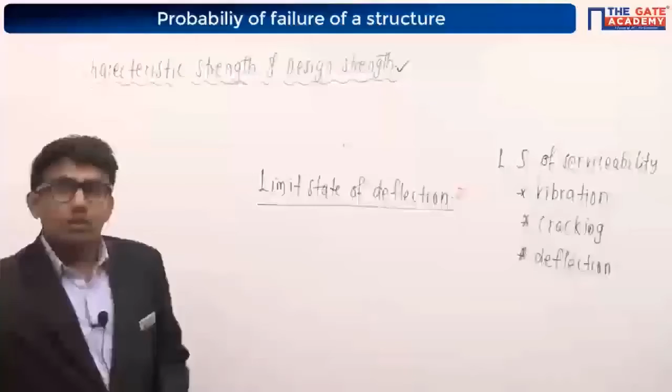So if you can solve this question, at least you can try this question. I think you may not be able to solve this question, but if you are able to solve it, superb, very good, try this question once. The question is, according to the concept of limit state design as per IS 456-2000, the probability of not failing the structure is. Even if you give the wrong answer, I will be very happy, at least you are trying. Yes sir, this question is already asked in GATE, it is a GATE question actually, but I have modified this question a bit.

I know some of you will have this equation by heart. Till now we have discussed about characteristic strength and characteristic load. When we talk about the failure of the structure, as per IS 456-2000, that code will consider a structure failed when... yes, this question. So I am coming to that, I will explain this and give you an explanation for this question. You can keep that question aside and listen here. So what is the possibility of failure of a structure?

As per IS 456, we have discussed characteristic strength, that is strength of the structure, and characteristic load. So there are actually two possibilities for a structure to fail. Possibility number one, I am going to consider it as P1, that is based on strength criteria, that is strength of the material. What was characteristic strength? The strength below which not more than 5% of test results are expected to fall. Which means if the strength is below that 5%, then the structure will fail.

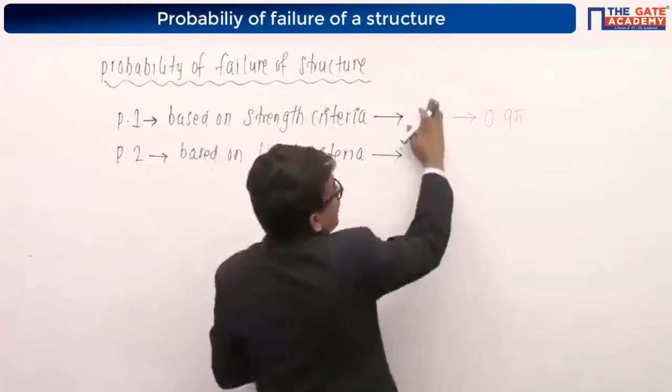What is the probability of failure there? It is around 5%, right? What is the probability of not failure there? It is also 0.95, because it has a 95% probability of not being exceeded.

Probability of not failing is 0.95 based on load criteria, and based on strength criteria also it is 0.95. So what is the overall probability of not failing? Here you have to refresh the concepts you studied in probability. These two events are independent. For independent events, the overall probability will be equal to P of A into P of B, if A and B are independent events. P of A here is 0.95, P of B here is 0.95, and the overall probability of not failing will be equal to 0.95 into 0.95.

Then tell me, what is the overall probability of not failing? It will come around 0.9025, or 90.25%. Which means that if you design a structure as per limit state method of design, the overall probability of not failing that structure is around 90.25%.

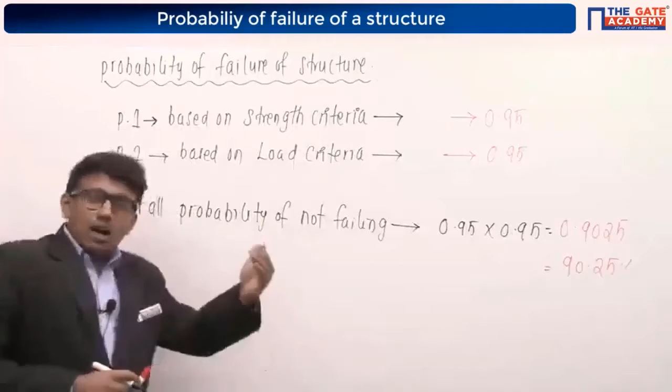Some of you are giving me the answer for overall probability of failure. If we modify this question again, what is the overall probability of failure of a structure as per limit state method of design, as per IS 456-2000? Can you give me the answer?

Give me the answer. Yes, 9.7. Superb. Why are you getting that?

Overall probability of not failing the structure is 90.25 or 0.9025. So overall probability of failure is around 1 minus 0.9025, which comes around 0.0975, or 9.75%. Overall probability of failure of a structure, when designed as per limit state method, will come around 9.75%. Overall probability of not failing a structure, per limit state method, will come around 90.25%. What is the meaning of these two sentences?

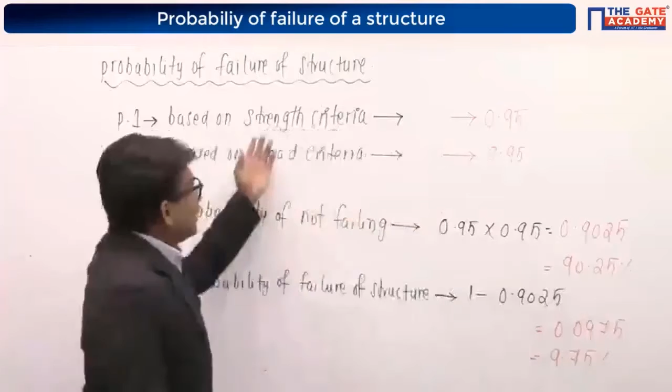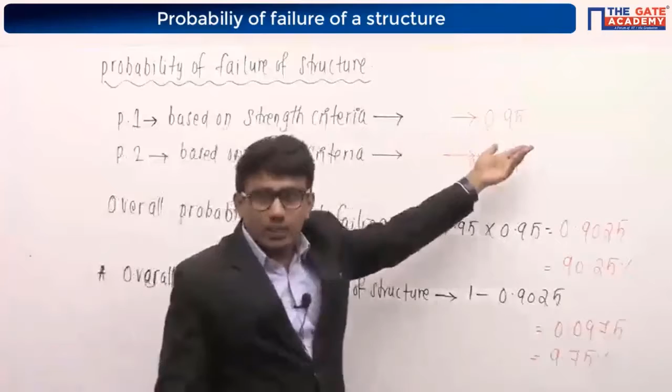In the limit state method, we have to consider two cases: material and load. When the load is more than the characteristic load, we consider the structure failed. If the strength is below the characteristic strength, we consider the structure failed. So there are two possibilities: either strength is more than the characteristic strength or less than it. There is a 5% chance of failure and a 95% chance of non-failure. Similarly, when the load is more than this value, there is a 5% chance of failure and 95% chance of non-failure.

So probability of non-failure as per strength criteria is 0.95, and as per load criteria is 0.95. Since they are independent events, the overall probability will be P of A into P of B, that is 0.95 into 0.95. We get overall probability of non-failure as 0.9025, which comes around 90.25%. Overall probability of failure of the structure will be 1 minus 0.9025, giving us 9.75%. Is it clear?

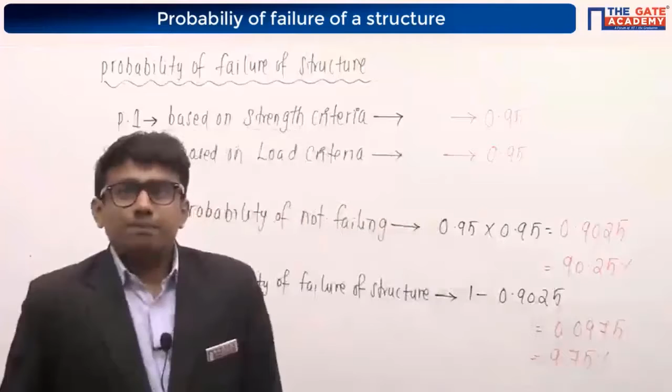So please give the next heading, grades of concrete. Grades of concrete - sorry, let me write it again. Give the heading: Grades of Concrete.

Tell me, what is this grade of concrete? Grade of concrete is actually based on the characteristic compressive strength of the concrete at the end of 28 days of strength. It is a strength value based on characteristic compressive strength, that is FCK, the characteristic compressive strength of concrete at 28 days. We calculate the characteristic compressive strength at 28 days, so it is based on that value.

So based on this characteristic compressive strength, we have different grades of concrete. We have M10 grade of concrete - we will discuss what this M10 means - and we have M15, M20, M25, like that, up to M55, M60, M65, going on till M90. We also have M5 and M7.5. It goes like M10, M15, M20, M25, M30, M35, M40, M45, M50, M55, M60, M65, M70, all the way till M90.

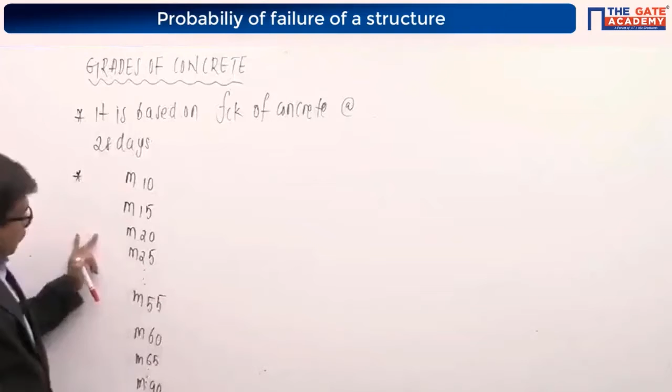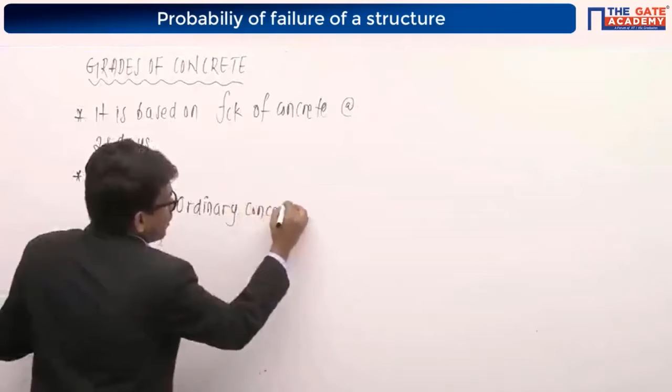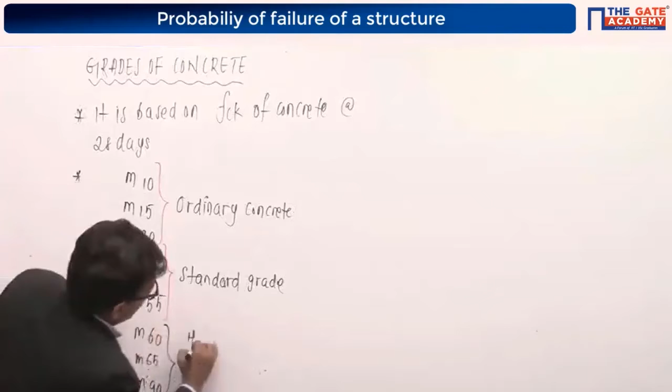So these are the different grades of concrete available. If you look at these various grades, from M10 to M20 is called ordinary grade or ordinary concrete. From M25 to M55, it is standard grade. From M10 to M20, it is called ordinary grade of concrete, and from M25 to M55, it is called standard grade. M60 and above is called high strength concrete. Above M60, it is high strength concrete.

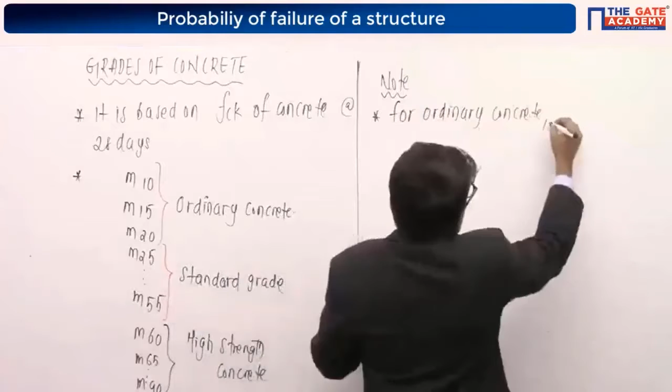So when we discuss the grades of concrete, you have to remember something here. Our IS code suggests that we have to use a minimum grade for ordinary concrete or ordinary construction in RCC. For ordinary construction or ordinary RCC, we have to use a minimum grade of M20. That is, for normal construction with reinforcement concrete, the minimum grade to be used is M20.

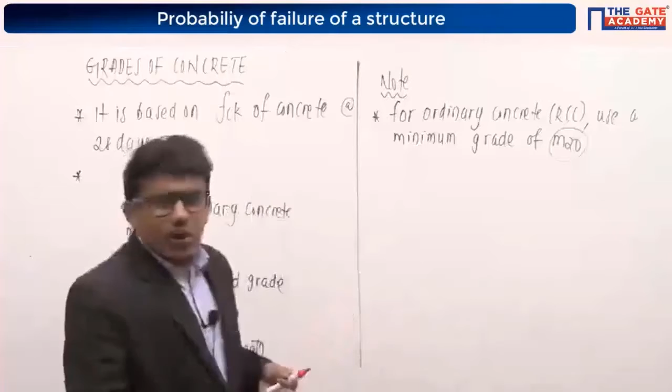We have to use a minimum grade of M20. Now you can ask me, but this grade of concrete actually depends upon exposure conditions. I'll tell you what these exposure conditions are. It is not always true that minimum grade must be M20. Our IS code says that for ordinary concrete, minimum grade of concrete must be M20, but it is not always true - it depends upon the exposure conditions of the concrete. I'll come to that.

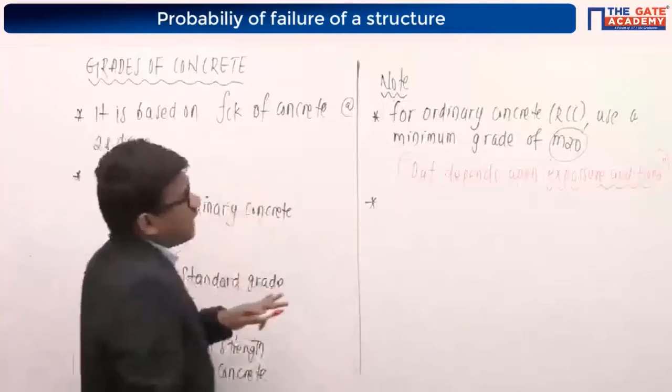Some of you can ask me, sir, what is this M20? If I take M20 grade concrete, what is this M? What is this 20? Yeah, exactly. M stands for mix, and 20 stands for FCK in Newton per mm square at 28 days, or the characteristic compressive strength of the concrete at the end of 28 days.

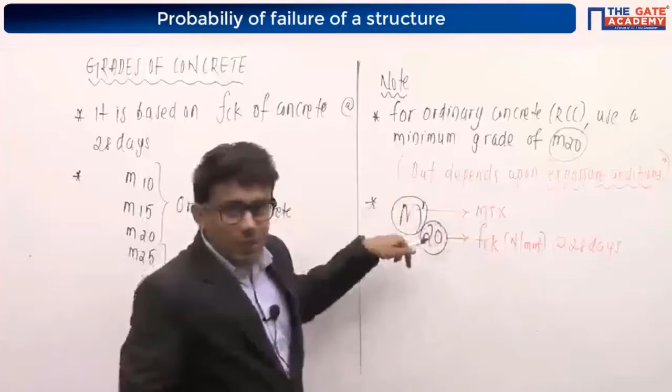Mix means we are mixing cement, fine aggregate, and coarse aggregate in different ratios. That is actually our representation of the mix. M represents mix of the concrete, and 20 is the characteristic compressive strength of the concrete at the end of 28 days.

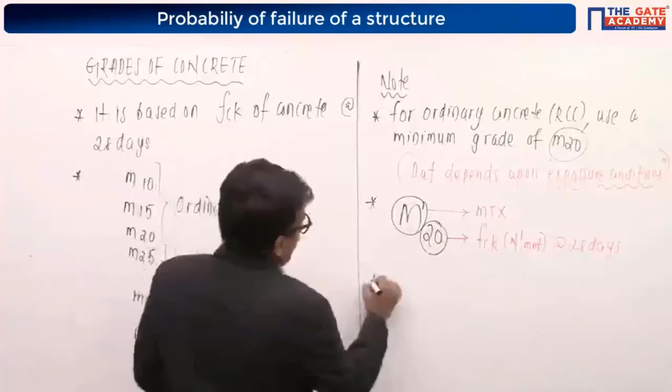Coming to one more point, our IS code says that the maximum grade that can be used is M60. Grades of concrete above M60 are not allowed or not taken into consideration. The maximum grade of concrete we are using is M60, not M65, M70, M75. All these are not considered in IS 456-2000. The maximum grade considered in our design as per IS 456-2000 is M60.

Srikanth is asking what is this mix. I'll write it here. For M20 concrete, the mix value will be 1 is to 1.5 is to 3. That means we'll take our ingredients of concrete - cement, fine aggregate and coarse aggregate - in this ratio: 1, 1.5 and 3. This is actually the meaning of mix of the concrete.

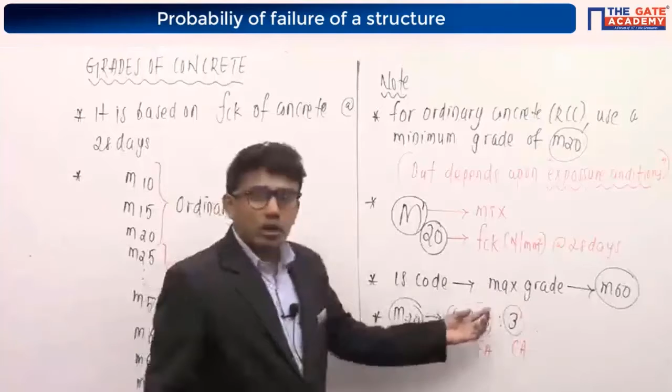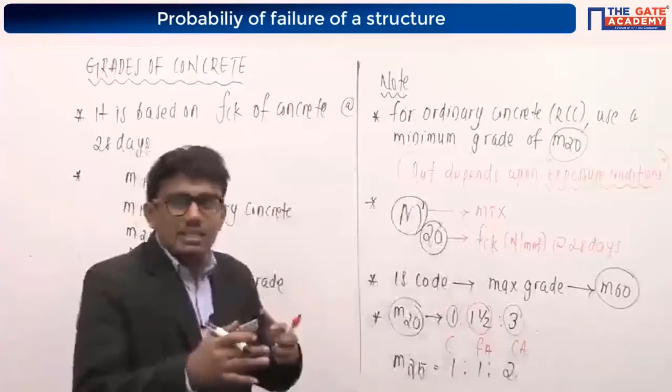For M20 concrete, it is 1, 1.5, 3. For M25 concrete, it is 1, 1, 2. It will keep going like that. Different mixes are available for different grades of concrete - the mix will be different. That's the meaning of mix - we are mixing all these ingredients. The ratio of these various components will be different for different grades of concrete.

For M5 concrete, the mix will be 1, 5, 10. For M7.5, it will be 1, 4, 8. For M10 concrete, it will be 1, 3, 6. For M15 concrete, it will be 1, 2, 4. For M20 concrete, it will be 1, 1.5, 3. And for M25 concrete, it will be 1, 1, 2. This means cement, fine aggregate, and coarse aggregate of the concrete.

Up to M25 we will be having nominal mix - these things are available. Above M25, you have to design the mix. Sir, how do you remember all this? See, you have to think in a different way.

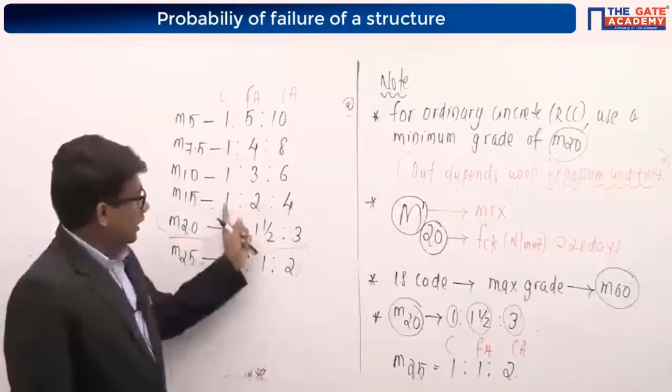I used to remember it in this way. If you want, you can remember it like this. We'll start with M5, right? So 1, 5, 10 - M5 is there, that is 1, 5, 10. Then the rest you can write: 1, 4, 8, then 1, 3, 6, then 1, 2, 4. Here a slight change happens - 1, 1.5, 3 for M20 concrete. Only for M20 concrete there is a slight change, and the same pattern repeats after this: 1, 2, 4 becomes again 1, 1, 2. You can remember it with your own shortcuts - it will be better.

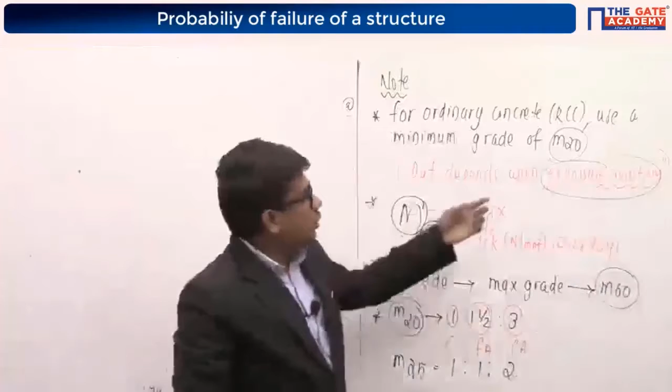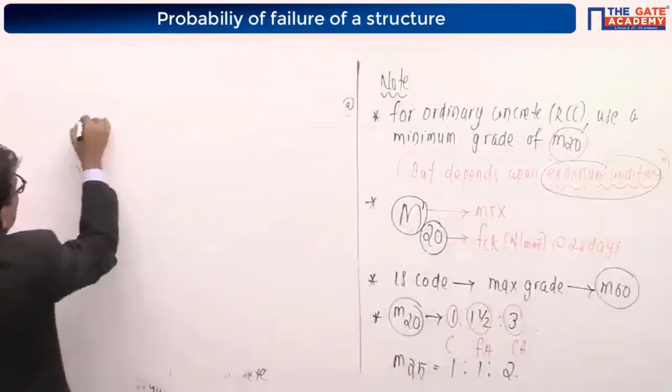So just now we have discussed about the exposure conditions. What are these exposure conditions? I told you for ordinary construction, as per IS 456-2000, we have to choose a minimum grade of M20, but it depends upon the exposure conditions. The IS code gives these things in a table, where the first column is exposure conditions, and the second column is the minimum grade of concrete to be used.

Minimum grade of concrete to be used. What is exposure condition, and what is the minimum grade of concrete to be used?

Exposure conditions are classified into five types. First is mild exposure conditions, second is moderate, third is severe, fourth is very severe, and finally we have extreme exposure conditions.

IS code suggests that for mild exposure conditions, you have to use minimum M20 grade concrete, and we cannot use M15 concrete there. If the exposure condition is moderate, you have to use a minimum M25 grade concrete.

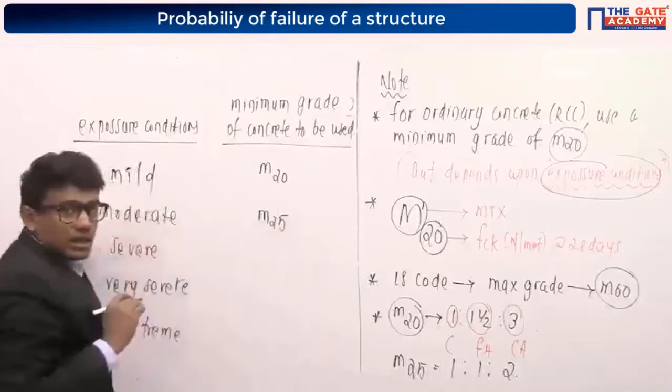If it is a severe exposure condition, we have to use a minimum grade of M30. For very severe condition, we have to use M35 grade concrete; we cannot use M30 there. For the extreme case, we have to use a minimum grade of M40.

You can ask me, sir, what are these exposure conditions? What is this mild exposure condition? What is this moderate exposure condition? What is this severe exposure condition and so on?

For mild exposure condition, if the concrete to be constructed is not exposed to weather conditions - suppose you see a ceiling above you, this ceiling is not exposed to rain or weather conditions - for these ceilings a minimum of M20 is required. Only minimum M20 is needed; we don't need to provide M30 for such cases. The minimum that can be provided is M20, or below this is not recommended.

So when the concrete is not exposed to weather conditions, or when it is exposed to small or light rain, we can use these mild exposure conditions.

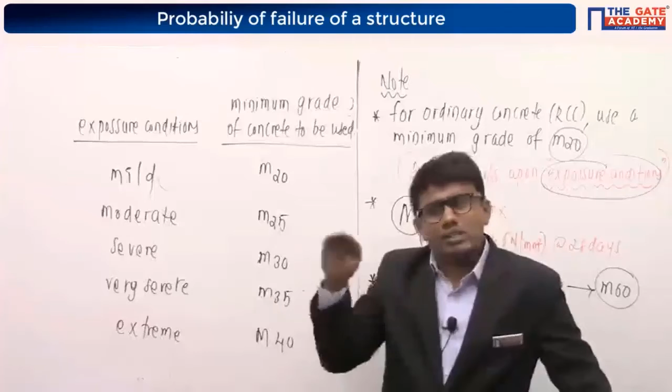Similarly, for moderate exposure condition - when the concrete is exposed to rain, like the ceiling over the top floor, or when the concrete is under pure water, or when it is not under the action of any aggressive environment, we consider that as moderate exposure condition.

Mild condition means the concrete is not exposed to any weather conditions, or it can be exposed to light rain, meaning very small intensity of rain. Moderate condition means the concrete is exposed to rain, or it is under water, but it is still not exposed to any aggressive environments.

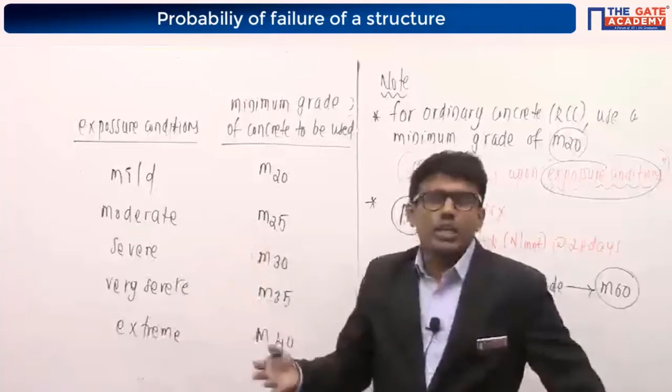Coming to severe conditions, the concrete is exposed to heavy rain, and if the structure is beside any seashore - now you know what a seashore is - if the structure is in a coastal area, or subject to some aggressive environment, we consider it as severe exposure condition.

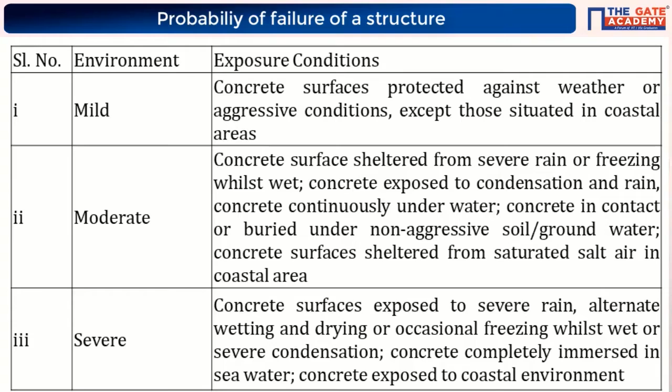It will go like that for the remaining conditions. All the things are given here in this table, which I have taken from IS 456-2000. It tells us which exposure condition to consider as mild, which to consider as moderate, which as severe, which as very severe, and which as extreme condition.

For very severe condition, we consider it when the concrete surface is exposed to corrosive fumes, or when the concrete is buried in aggressive soil, etc. For extreme condition, when the concrete is in a tidal zone, or it is an offshore structure, it will be considered as extreme weather condition.

For these conditions, we have to use a minimum of these grades. You can go through this table once - you have the environmental conditions there: mild, moderate, severe, very severe, and extreme, along with the corresponding exposure conditions. Go through them now, and after that we will continue with the other concepts.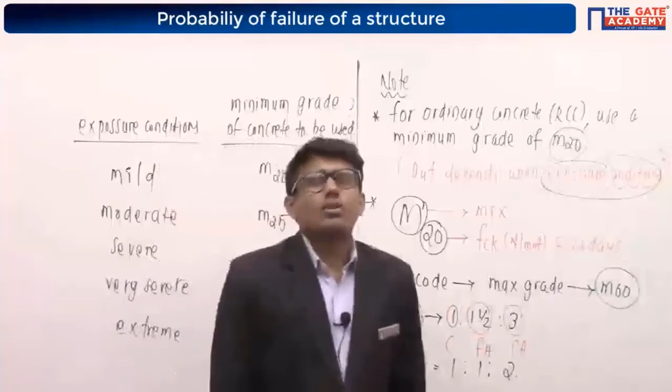Go through those two tables - mild, moderate, severe, very severe, and extreme. You have to remember this, because IES has asked questions from this concept around 3 times.

For offshore structures, the minimum grade of concrete to be used is M40. Offshore structure means the structure is subject to tidal effects, it is in the tidal zone. So you have to use a minimum of M40 grade concrete.

One time they asked: for structures in coastal areas, what is the minimum grade of concrete to be used? Can you tell me what is the minimum grade of concrete when the structure is in a coastal area? Yes, M30. It was a great question actually.

So they are asking questions from this condition. So you have to remember this.

If it is not exposed to rain or any weather conditions, it is mild. If it is exposed to light rain, or not in any aggressive environment, we consider it moderate. For severe, when it is subject to heavy rain, or if the structure is in a coastal area, we consider it as severe.

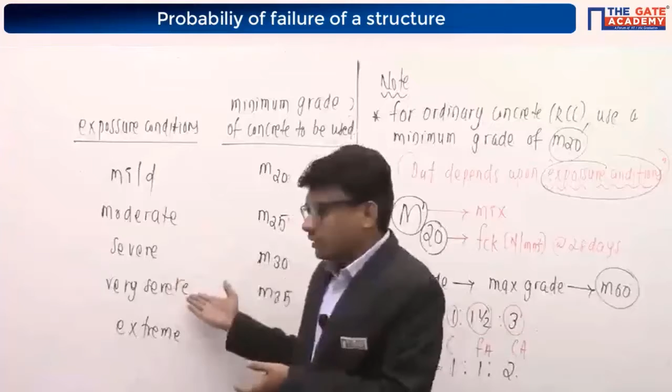Similarly, you can follow the other conditions. Don't try to by-heart them, just try to understand them, about nuclear radiation.

For nuclear radiations and such, you have to consider high strength concrete, not even M40. You have to go with high strength concrete - you can make the concrete as strong as possible. These are just criteria. If you want, you can consider it as an extreme condition - it will definitely come under extreme conditions.

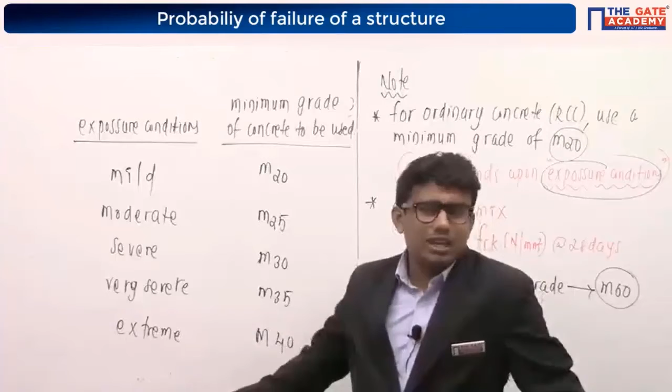You have to use a minimum M30, M40. But anyhow, if there is nuclear radiation, you have to use a higher grade concrete, or the maximum grade possible. Suppose if you want, you can use M60 or even M65. It's a matter of safety.

Rudraj is asking, isn't water good for concreting? Yes Rudraj, actually after setting, water is required at the early stage of concrete. The purpose is for curing. It is called curing, so we need water for the proper attainment of strength.

But in the later stage, it will affect the strength of the concrete. Please note it down. You can write the summary of this table in your book. Don't try to mug up this table, but go through it once - it's important, that's why I'm giving you this table. Just go through it and write the summary.

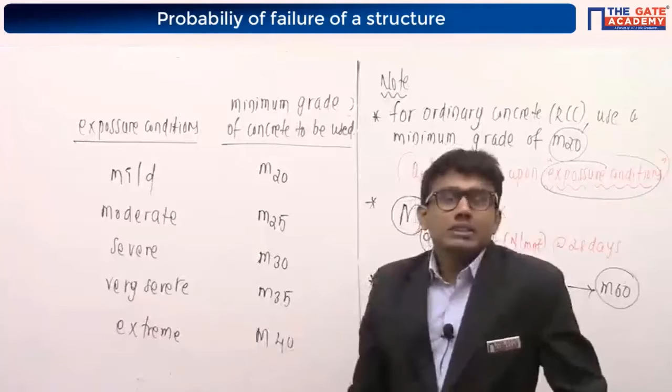Rudraj asks if it will not help in getting full strength. See, if it is exposed to water for a very long time, it will affect the strength. No - water in the initial stage helps the concrete gain strength. In the later stage, see, too much of anything is not good - the same thing is applicable for concrete also.

Go to this question, you already know the answer. A reinforced concrete structure has to be constructed along a sea coast. The minimum grade of concrete to be used as per IS 456-2000 is: option A M15, option B M20, option C M25, option D M30.

We can easily eliminate option A, because for an RCC structure, as per IS 456-2000, we have to use a minimum grade of M20. So we cannot use M15, and we can eliminate option A. Coming to option B, C, D, we have to think about the exposure conditions of the concrete.

We have to think about whether it is in mild, moderate, severe, very severe, or extreme conditions. Here it is given that the structure is constructed along a sea coast, that is, in the coastal area. If it is in the coastal area, the exposure condition is severe, and the minimum grade of concrete to be used is M30. So the answer here is option D.

Right now, if this is the sea, this is the land, and you will be constructing the concrete here. This concrete structure is actually subjected to the wind from here - wind will be continuously blowing from the sea.

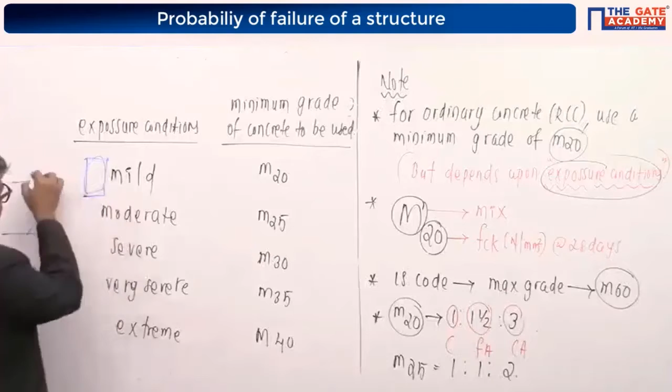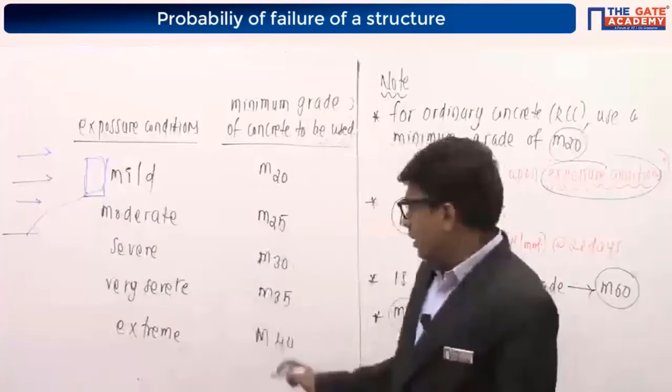It will be having salt content, so it will affect the strength of the concrete. It will cause corrosion and all. That's the reason why we are increasing the strength of the concrete by increasing the grade. If it is in salt water, then we have to use M40, a higher grade of concrete.

So the next one is the acceptance criteria. We have to discuss one more concept here. What is this acceptance criteria?

Suppose I am taking a grade of concrete, I am considering M20 grade concrete, and I know the mix to be used. What is the mix to be used here? It is 1:1.5:3. So this is the mix to be used for constructing our M20 concrete.

So we are going to construct and test the strength of this, testing the compressive strength of the concrete. For that purpose, usually we go with our cube strength test, which we have discussed just now. We will consider a cube of size 150mm by 150mm, and take different numbers of cubes.

Suppose cube number 1, cube number 2, cube number 3 are there. Suppose we have n number of cubes. I'll take cube number 4, cube number 5, and we have taken n number of cubes for finding the compressive strength of the concrete.

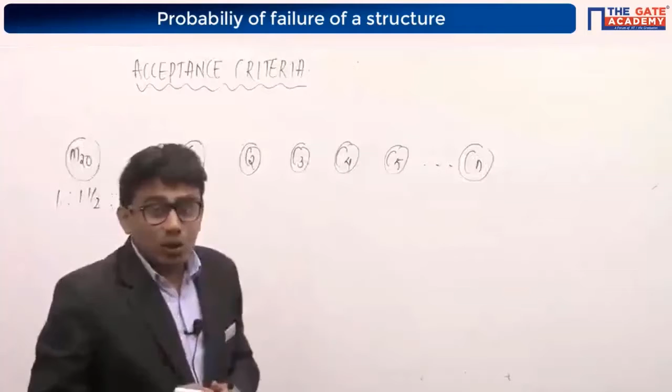So each cube will give some compressive strength. Our IS code suggests that we take a minimum of 3 samples and calculate the mean strength of each cube.

Suppose I have taken C2, C3, and C4. The compressive strength of cube C2 I will consider as F1, compressive strength of C3 as F2, and compressive strength of cube C4 as F3. So these are the compressive strengths obtained from cubes C2, C3 and C4.

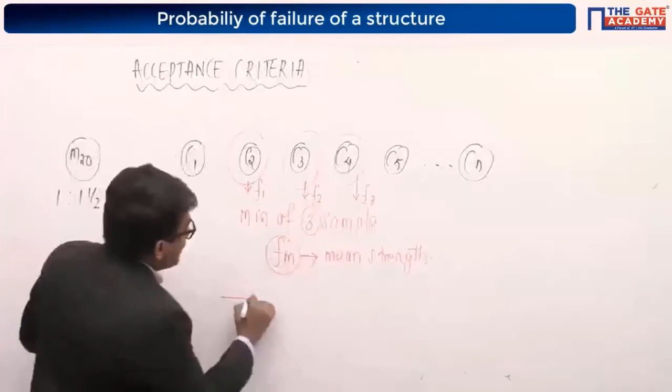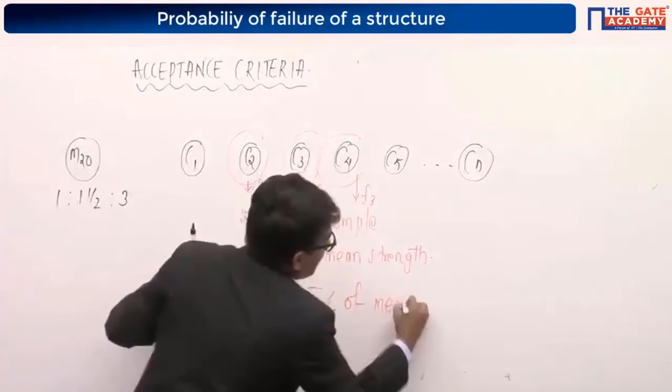Our IS code says suppose Fm is the mean strength, we have taken a minimum of 3 samples, and Fm is the mean strength. The percentage variation of the strength, that is F1, F2 and F3, must not be greater than plus or minus 15% of our mean strength.

You have to remember this. If it is more than plus or minus 15% of the mean strength, we will not use this grade of concrete for design or construction. We cannot use that concrete for construction.

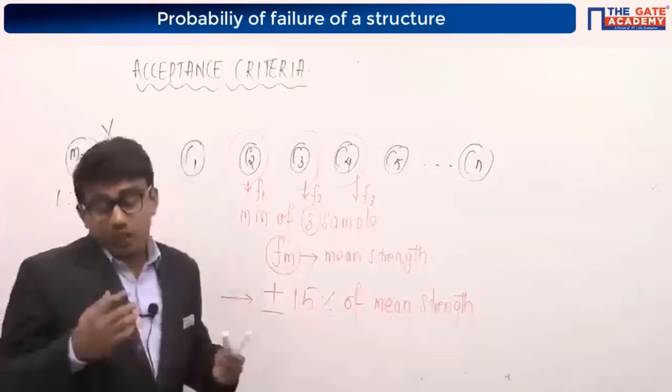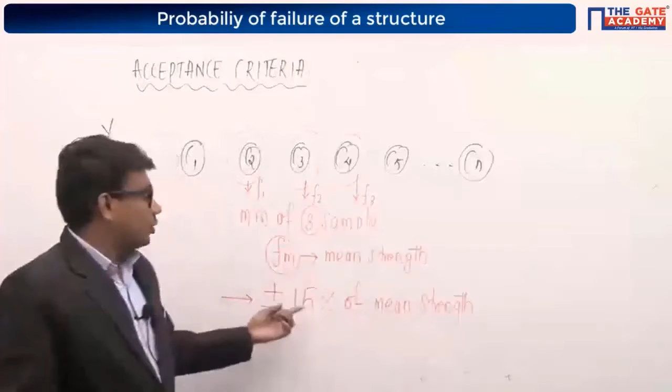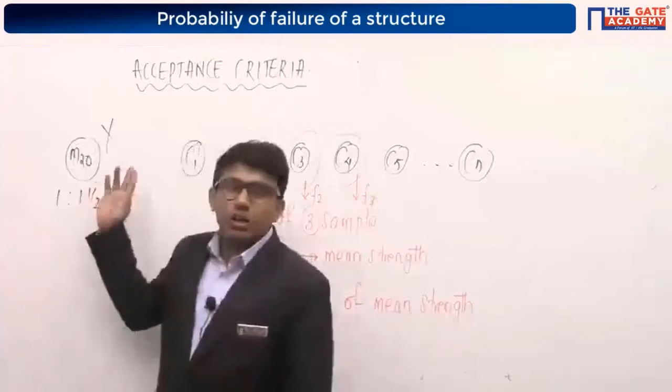So if I want to use M20 concrete, we will mix n number of cubes, take randomly a minimum of 3 samples, and find the mean strength of those 3 samples. The individual variation must not be greater than plus or minus 15% of the mean strength. If it is more than 15%, we cannot use that concrete for construction. This is the acceptance criteria.

What IS code says is that we'll take a different number of samples and go with the cube strength test for finding the strength of the concrete to be used. So I have taken one grade of concrete, that is M20 grade.

Yes, Rudraj, you are right. Then not the strength, that percentage variation.

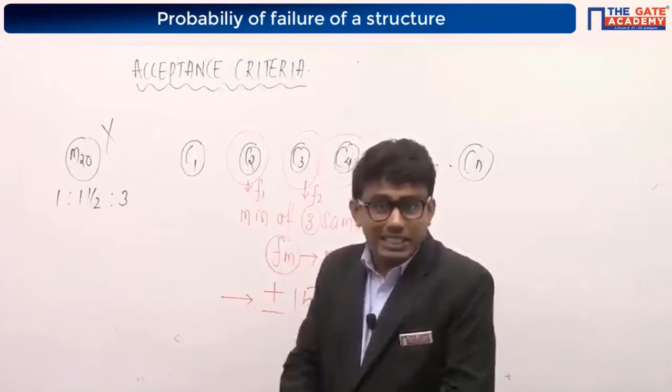I'll tell you that. Suppose we have taken n number of cubes. I have taken the mold, put the concrete, after 24 hours taken it outside for curing, and after 28 days tested the compressive strength of each concrete. Suppose these are the n number of cubes we have taken.

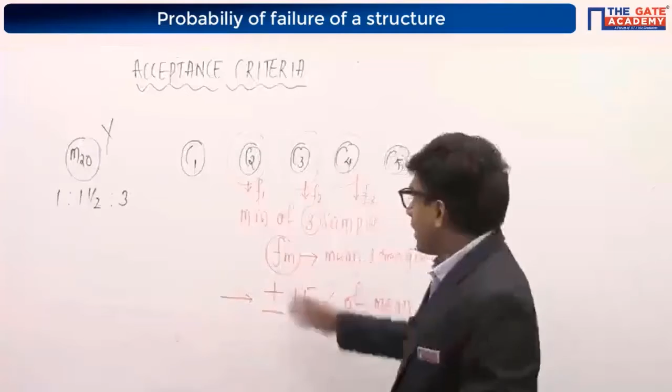Instead of calculating the strength of each and every cube, our IS code says we can randomly collect 3 samples from the number of cubes prepared, a minimum of 3 samples must be selected. Calculate the mean of these samples, and after that calculate the percentage variation.

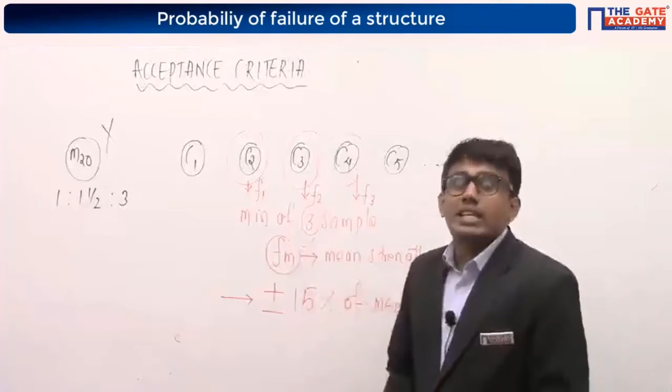What is this percentage variation? Suppose this is F1, the strength of cube 2, and Fm is the mean strength. What is this percentage variation?

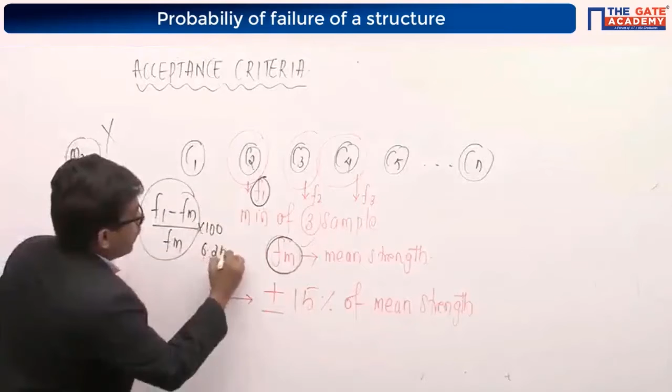F1 minus Fm divided by Fm, into 100, will give you the percentage variation. Suppose I got it as 6.25% for cube number 2. Since 6.25% is within the limit, I will accept this concrete, C2.

Similarly for C3, suppose I calculate it using F2 minus Fm divided by F2. Sorry, it was Fm in the beginning, now it is F2. Not Fm here, it is F1 and F2.

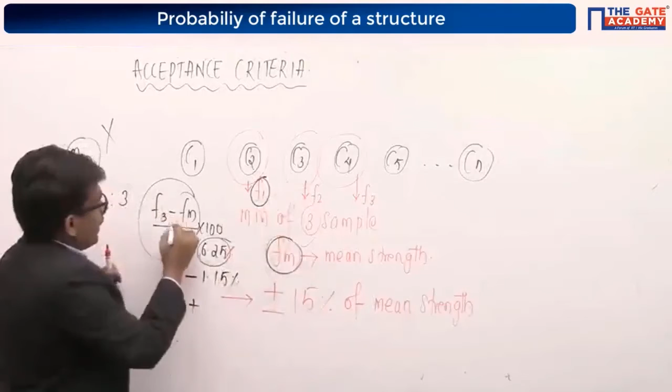Suppose the percentage variation I am getting is 1.15%, which is within plus or minus 15%, so I will accept it. And for cube C4, using F3, suppose the percentage variation is around 2.5%, I will accept the concrete. Why? Because for all 3 cubes, the percentage variation is within plus or minus 15%.

Suppose instead I got it around minus 16.25%, will I accept this concrete or not? No, we cannot accept this. As per IS 456-2000, the code is saying that you should not accept this concrete.

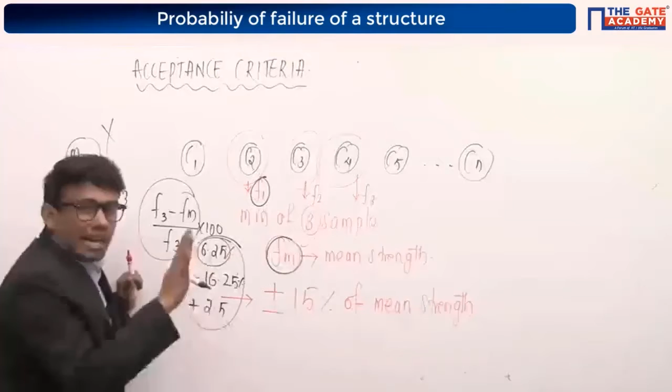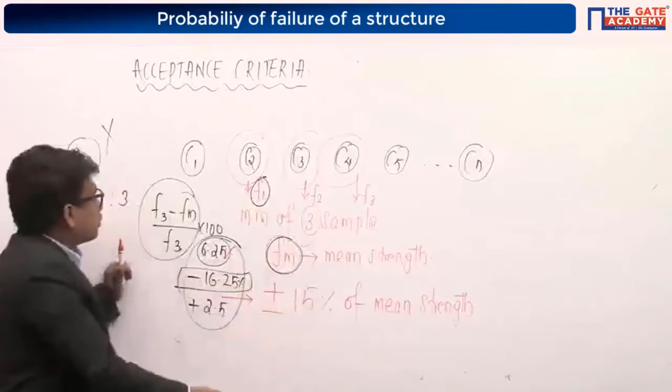Why? Because you have taken a minimum of 3 random samples. When you calculated the mean strength and the percentage variation in strength, you obtained a variation which is more than plus or minus 15%. So you cannot accept this concrete. That's the meaning of it. We are doing this practically before constructing a structure.

Sir, why are these cubes not accepted? Not the cube, the structure will not be accepted. That concrete will not be accepted.

Suppose, for example, I am the client and I am coming to you for constructing a structure. You are the constructor. So before constructing that structure, I am asking you: I need the test results of concrete. I need to know which type of concrete you are going to use, and I need the information about the reinforcement you are going to use.

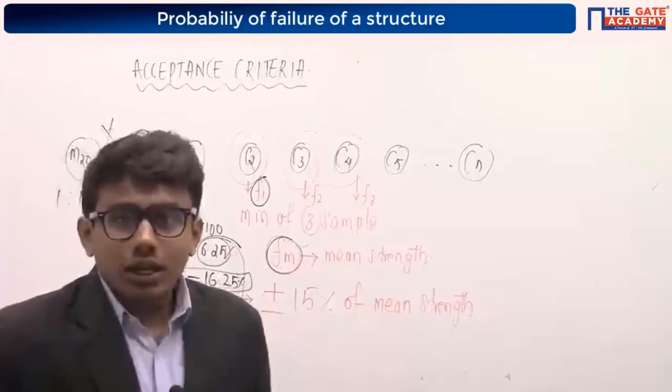So what will you do? You will go with the cube test. You will construct the cubes, you will take M20 grade concrete. Sir, this is the grade of concrete I am going to use, and when we use this grade of concrete, we are going to get this much strength.

But to understand this, the IS code is going to help me, the client. After constructing all these cubes, if you are getting the percentage variation more than the allowed limit, our IS code is saying that it is not safe and economical to use that concrete given by you, the designer or contractor. So we are not going to use that concrete.

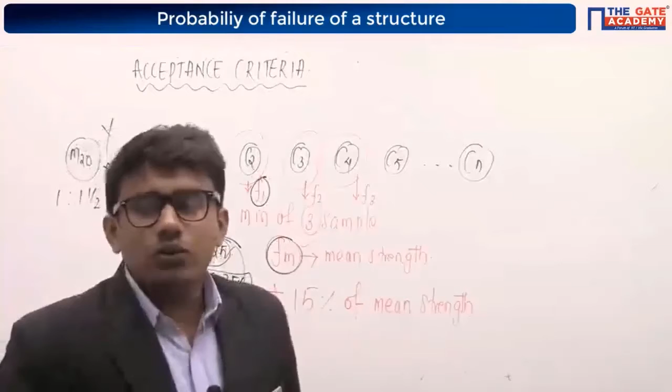So these things are done practically in our day-to-day life. Only a minimum of 3 random samples must be taken. That's a recommendation by IS 456-2000.

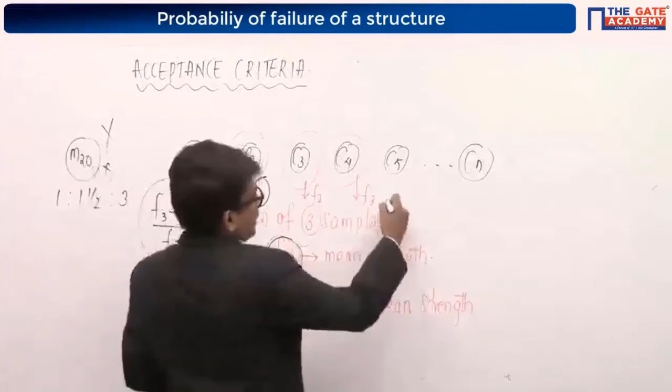Remember, these 2 values are important actually, it can be asked in any of these competitive exams. For accepting this, we have to use a minimum of 3 samples, and the percentage variation must not be greater than plus or minus 15%.

Ruduraj asks, if the samples are taken during casting and it is failed? See, these are the recommendations by IS 456-2000, so you have to follow that. We cannot test the cube for compression immediately during casting. That will not give you the exact compressive strength of the concrete, because it is still in the plastic stage. No, we cannot do that.

Sir, we will get the results after 28 days. Now see, these things we will do before construction, not after the construction. Before constructing a structure, as a client I will ask you which concrete you are going to use. We will test the concrete before constructing, not after. These things are done in the design stage itself, not during the construction stage.

Okay, next one, I can give the heading stress strain curve of the concrete. I have to discuss this also, which is not that much important, but I have to discuss some points here: stress strain curve of concrete.

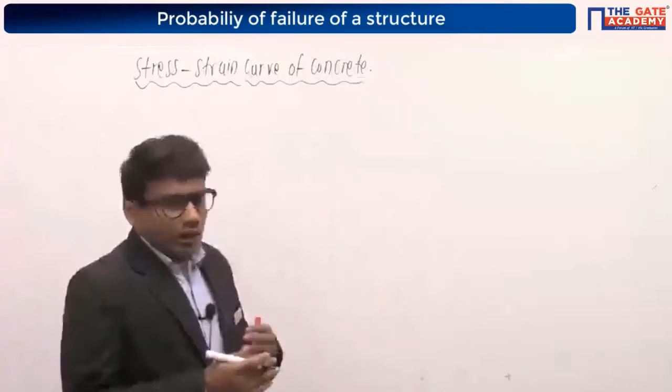Stress strain curve of concrete. So what is this stress strain curve of concrete? Or you can say stress strain curve of concrete in uniaxial compression.

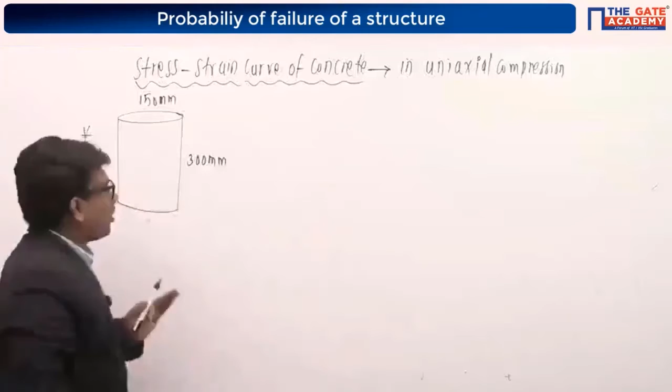In order to draw the stress strain curve of concrete, our IS code suggests taking a cylinder whose diameter is 150 mm and whose length or height is around 300 mm. Take a cylinder like this, and after 28 days of casting or curing, take it to a universal testing machine, apply the compressive load like this, and draw the curve. That's what we are going to do.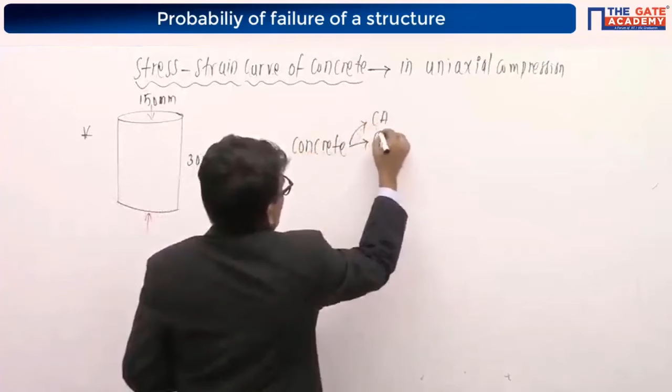When we discussed the basic components of concrete, I told you concrete is a mixture of coarse aggregate, fine aggregate, cement and water. Together I am going to consider coarse aggregate and fine aggregate as aggregates, and cement plus water I am going to consider as cement paste.

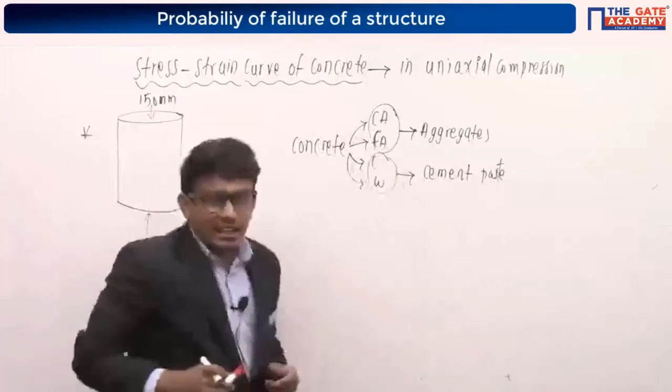I am going to discuss something here. If you think about the stress strain curve of the aggregate, it is interesting to note that it will be a straight line. If you draw the stress strain curve, you will have stress on the y-axis and strain on the x-axis. For aggregates, you will be getting a straight line. I am giving you the results directly. You have to remember this: we will be getting a straight line for aggregates.

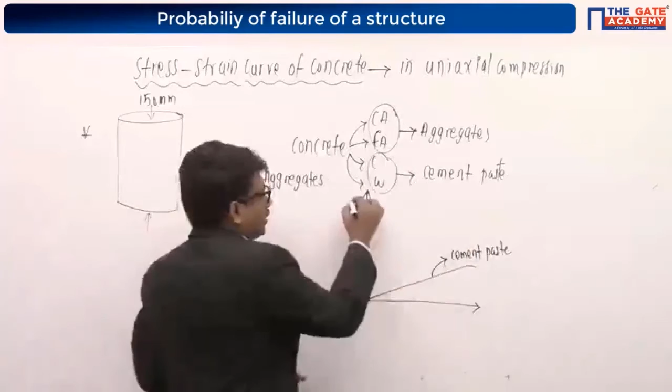And if you talk about the cement paste, for that also you are going to get a fairly good straight line. This will be for our cement paste. So for aggregate it will be a straight line, and for cement paste it will be a fairly good straight line. Here also, stress is taken in the y-axis and strain is taken in the x-axis.

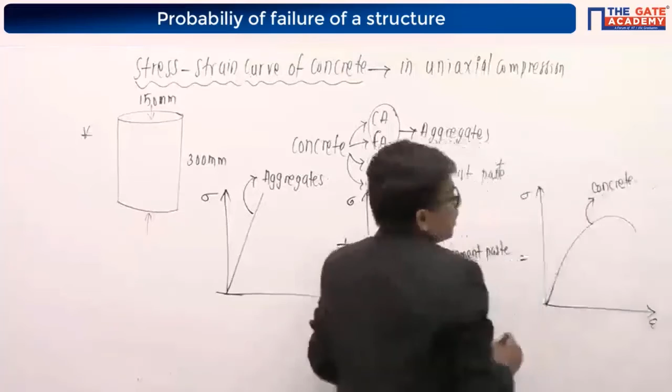Our concrete is actually a combination of aggregates and cement paste. So you can remember that the stress strain curve of concrete will not be a straight line. After this test, you will get a stress strain curve which is non-linear. Initially some small portion will be linear, but generally it is a non-linear curve. You have to remember that the stress strain curve of concrete will be a non-linear one under uniaxial compression.

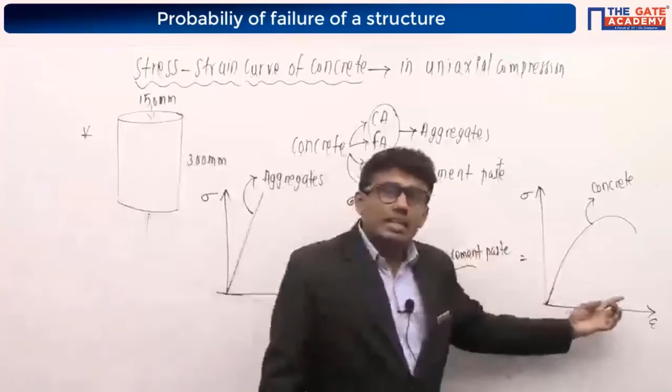To draw the stress strain curve of concrete, we take a cylinder of size 150 mm by 300 mm for uniaxial compression, and draw the stress strain curve. You will get a curve that is non-linear in nature.

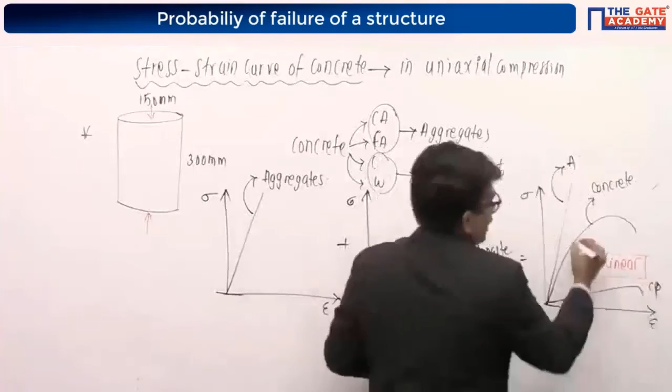If you want, we can draw all the things together. This is for aggregates, this is for cement paste, and this is the stress strain curve of concrete, which will be a non-linear line. Please note it down: stress strain curve of the aggregates, stress strain curve of the cement paste, and the stress strain curve of concrete, which is non-linear.

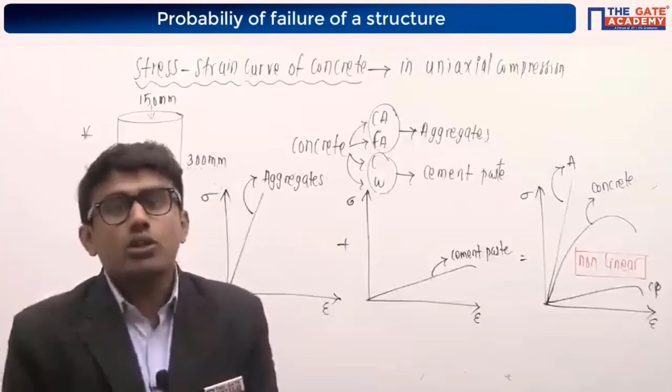This was a GATE question, I guess. They gave these three graphs and asked: which among these is the stress strain curve of aggregate, which is the stress strain curve of concrete, and which is the stress strain curve of cement paste. It was also an IES question, I believe - asked in both GATE and IES. Yes, I think it's done, right?

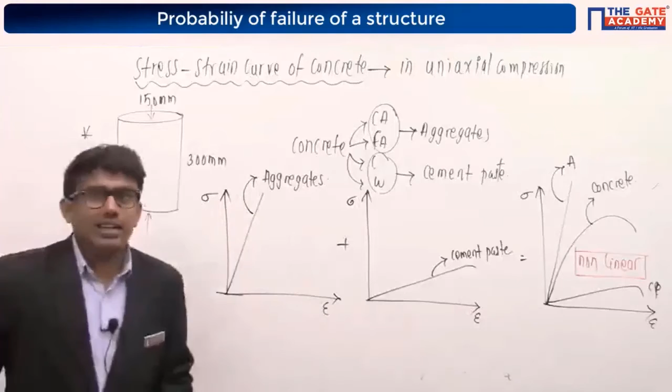I am taking the stress strain curve of the concrete again to explain some more things. I told you the stress strain curve of the concrete will be a non-linear line like this. It will go like this. It is generally observed that the curve goes like this. This is the stress or the strain, the strain value.

You can see in the curve there is a maximum strain value occurring at this point. So at this strain value, we are getting the maximum strength or maximum stress in the concrete. For a strain value here, I don't know what strain value that is, but for that strain value, we are going to get a maximum stress.

This strain value is generally observed to be 0.2% or 0.002. It is generally observed that this is drawn for ordinary grade concrete. For ordinary grade concrete, the maximum strength or stress value will occur at a strain value of 0.002, and that stress value corresponding to this strain is taken as FCK, that is, characteristic compressive strength of the concrete.

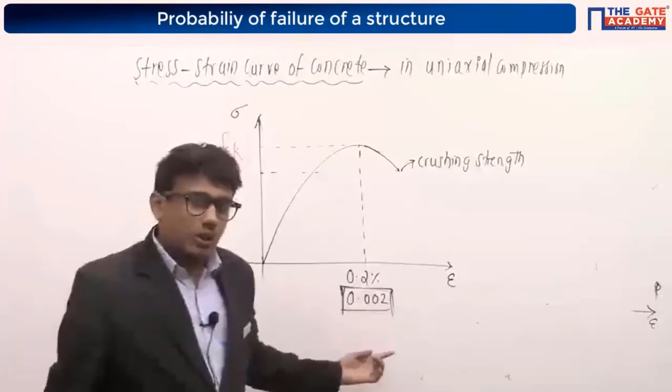One more thing to remember: this is the point where the curve ends. The stress value corresponding to that point is called crushing strength, and the corresponding strain is called crushing strain. You can remember this: the peak value or maximum strength occurs at a strain value of 0.002, which is considered our characteristic compressive strength, and the point where the curve ends is called crushing strength, with the strain at that point being our crushing strain. This is for ordinary grade concrete.

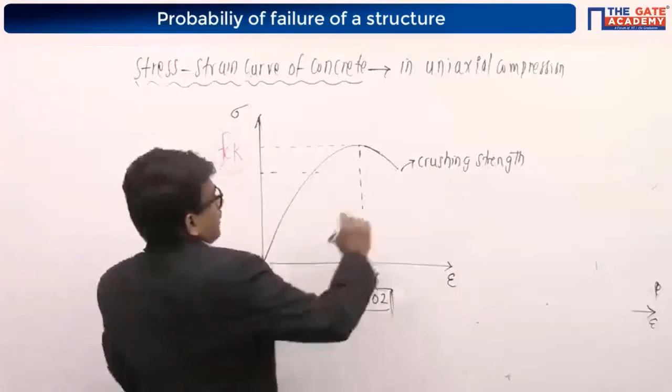This is for ordinary grade concrete, and for higher grade concrete you get a curve like this. For low grade concretes you get a curve like this, or lean mixes, meaning lower grade concrete or concrete having low strength, lower mixes. For lower mixes you will be getting a flatter curve. For high grade mixes you will be getting a steeper curve.

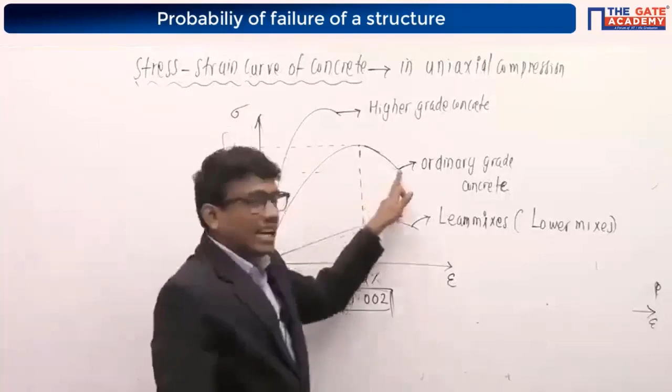This is the crushing strength, the value you get here. The strain corresponding to that is called crushing strain. For this higher grade concrete, the crushing strain will be somewhere around 0.2 to 0.5 percentage, or you can say 0.3 to 0.5 percentage. It will vary from 0.3 to 0.5%.

So you have to just extend the curve like this. This is 0.2 now, and it will come around 0.3 to 0.5 percentage. Please note down that the behavior of concrete is non-elastic. We are coming to that. Just remember these things: this is the strain value for maximum strength, and the point at which the curve ends is called the crushing strength. This is for high grade, it will be a steeper curve. For lean mixes, for lower mixes, it will be a flatter curve. For higher grade concrete, the crushing strain will be around 0.3 to 0.5.

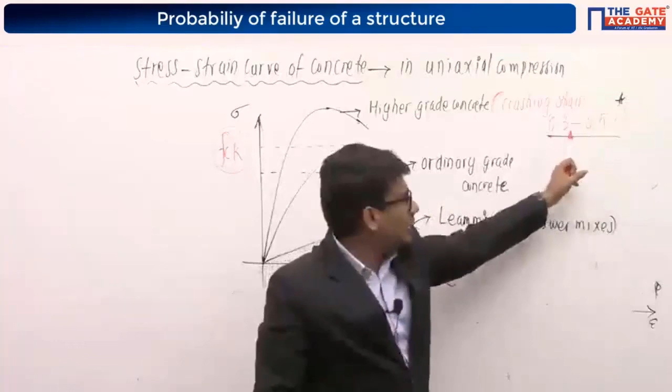It is important, I'll discuss this. Don't mug up these values, don't memorize them by heart, it's not required. But this is important to discuss something, I'll come to that. We will require this when we discuss the assumptions of the limit state method. We need that.